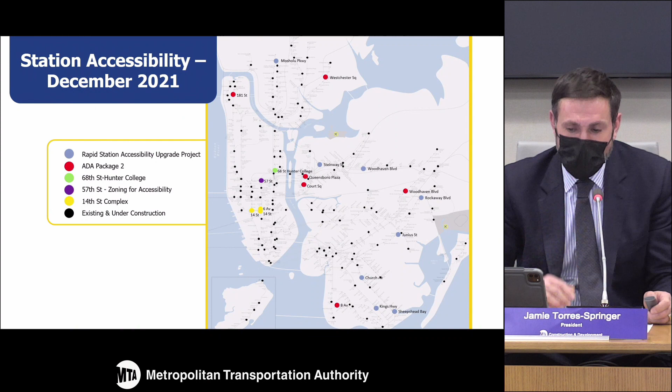You can see the new stations on this map, and I'll go through them in a moment. I want to emphasize that we're using our new modernized approach to capital delivery to deploy every innovative tool at our disposal in creative ways to achieve ADA station improvements.

While we've been using design, build, and bundling of projects extensively, we are seeking the board's approval this month to go to the market for a public-private partnership to deliver 13 stations for us, 8 newly accessible and 5 rehabilitations, through the Rapid Station Accessibility Upgrade Project.

You can see the new stations within that program in the light blue dots on this map. This innovative approach has been used successfully elsewhere across the country and around the world, but is new for the MTA. We also might refer to it as design, build, finance, and maintain.

It means we're engaging with a private partner who will be responsible for building the accessibility improvements quickly and at a lower cost, and who will also be on the hook to maintain the elevators for 15 years. Their payments will be entirely dependent on achieving a high standard of maintenance over that entire period. We expect this strict contractual approach will yield very high outcomes for the quality of elevators in our stations.

We're also seeking the board's approval to award design build contracts for 9 additional stations, including package 2 here in the red dots, a package of 8 stations, 6 of which are new. It's a $251 million investment to be built through design build with a completion date of 2024.

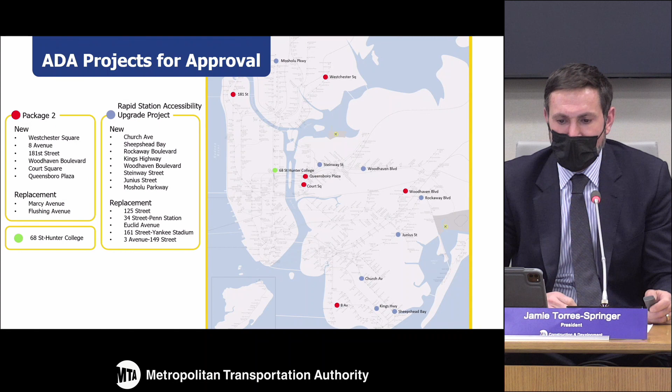And for the 68th Street Hunter College station, that's a $105 million investment. This is very significant as it is the 100th station out of the original 100 stations identified as key for accessibility by the MTA. We forecast completion for that project 36 months from this month, the date of award.

We also awarded a contract last week to make 3 stations on the L line on 14th Street fully accessible. The board approved that last month. We anticipate completion in 2024.

We had our first approval under the Zoning for Accessibility program this month, where a development partner will build elevators at the 57th Street F station. You can see that on your right. That allows access to Central Park and Carnegie Hall, a critical station, and the developer will reimburse the MTA for the cost of maintenance. We're really pleased we were able to create this new zoning incentive with the Department of City Planning.

That makes 26 stations moving forward just this month, 19 of which are newly accessible stations. It's on top of the 13 new accessible stations currently in construction, which will be completed in 2022 and 2023, and 3 station improvements finished just this month. So moving on from accessibility, in total, we're seeking approval of 13 awards today.

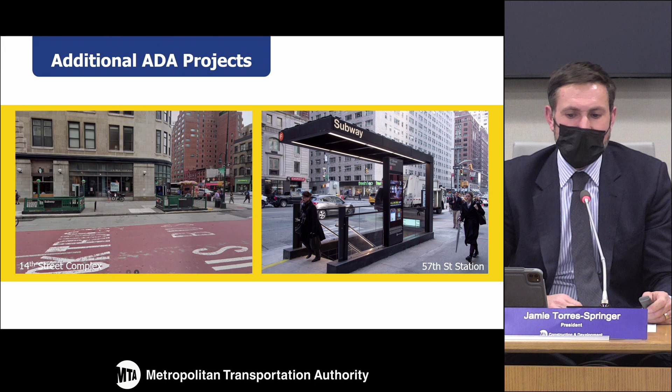In addition to accessibility, I would also highlight our continued work on modernizing the signal system with a new equipment supplier and installer for communication-based train control on the Queens Boulevard East line, and the replacement of the Queens interlocking signal system for LIRR. The last month has also been very active for construction and development on the commitment front.

Our development and procurement teams have been and continue to work very hard to get as many projects packaged and awarded as possible so that we can meet or exceed last year's $6.2 billion commitment number. This quarter, as you see on the left, we have already awarded 18 contracts for $129 million. In this final stretch of these last couple weeks, we expect to award many more projects this month in December.

I would also note that our small business mentoring program, which is an acknowledged leader in promoting MWBE participation in the world of public construction, is something I intend to make a priority of my time at C&D. We continue to make gains in this regard. This year, we've already awarded 44 contracts in this program for over $43 million. And again, the month of December is far from over from a commitment point of view.

We expect to do a lot more in December, so we'll have results to report back next month. We'll get into this more then with a full update, but I want to note that with all this work, we continue to see benefits in terms of value for money from the steps taken to improve capital delivery.

As one measure of success, we're finding that our competitive bids are consistently meeting or under our estimates for those projects. So far this year, 70% of our final selected bids were below our estimated cost, which represents real savings for the capital program.

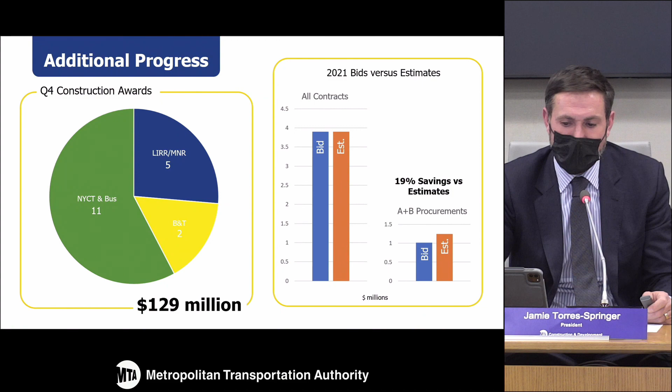It also amounts to a combined 196 months of construction duration saved, which is 9 months per project on average. So that's the update.

In the work plan for CPOC this month, we're giving an update on 3 major integrated mega projects. Just before we get to the Penn Station Concourse project, we have a short video to highlight some of that work.

I want to underscore one point, which is that as part of this innovative public-private partnership for ADA, which has never been attempted before to our knowledge, we are linking payment to the contractors to the success of their ability to maintain availability. So unlike the couple of historical elevators which were built by real estate developers, who had to put in an elevator because the city planning department said this is an improvement you must make.

Once they did it, they got the zoning bonus, and we've sometimes had problems getting them to make the elevators available at all times. They're under the jurisdiction of the buildings department. That's bureaucracy, but it's the truth.

In this case, we will be under the incentive and the requirement that the elevators be available to a very high standard and not broken, which is something we get to enforce, and they will have specific financial incentives linked to. So it's very different than those couple of developer elevators, 53rd and 3rd, and a couple others that have given us headaches in the past, and I don't want that to be misunderstood.

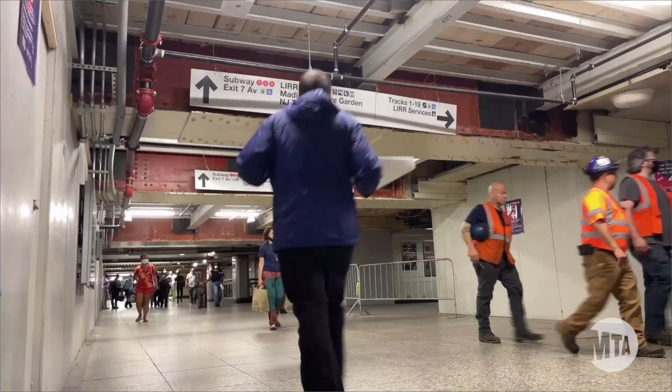Penn Station is the largest transportation hub in the U.S. Three commuter rail services, as well as six New York City Transit subway lines, all converge here in one complex. So whether you're commuting, visiting, headed to work, or just passing through, there's a good chance Penn is going to be the first thing you'll see when entering into New York City.

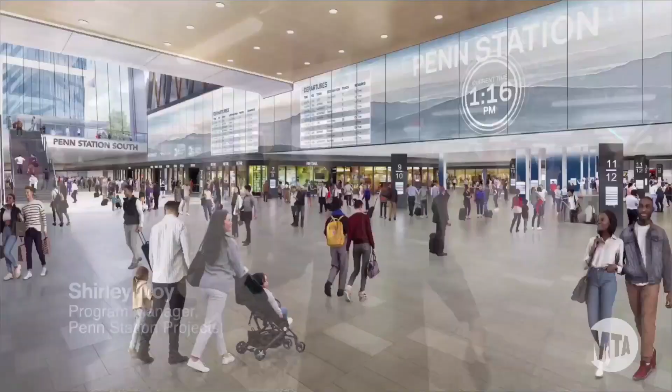Over the years, the different operators, New Jersey Transit, Long Island Railroad and Amtrak, started doing renovations on their own. Each carrier renovated their portion of the station, but there was no common solution for the station as a whole, and it became very confusing. Today, there's a more concerted effort to improve Penn Station.

The end of 2020 marked two major accomplishments as part of that plan: the opening of the massive Moynihan Train Hall and the opening of the East End Gateway.

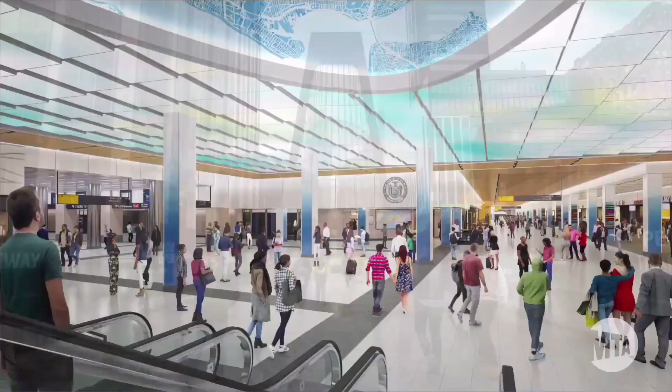Now, the Long Island Railroad Concourse renovation is headed into its final year. The 33rd Street Connecting Concourse and Long Island Railroad Concourse are projects that are going to create additional space for the customers. In order to do that, the key is to take some of the space that was previously used for back of house and retail to provide additional concourse space for customers.

You can get a sense here of how much more space there'll be when the project is completed in early 2023. The columns on the left are where the retail storefronts used to be. They'll now be along the right-hand side when they reopen, which will improve the width of the concourse by 30 feet. You can also get a sense of the new ceiling heights.

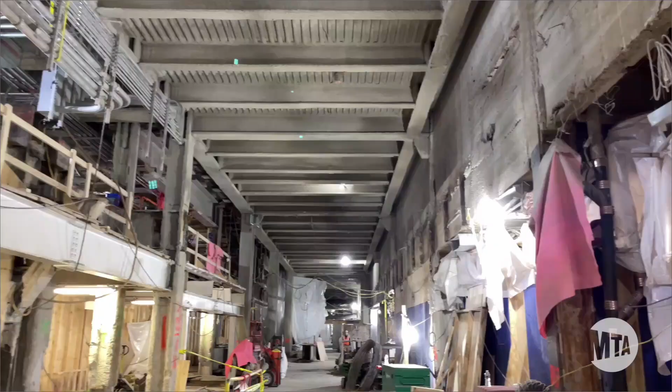Below this ceiling here is where you'll see custom backlit illuminated ceilings to brighten the corridor and make it feel a bit more safe, comfortable, and allow for better circulation throughout the concourse.

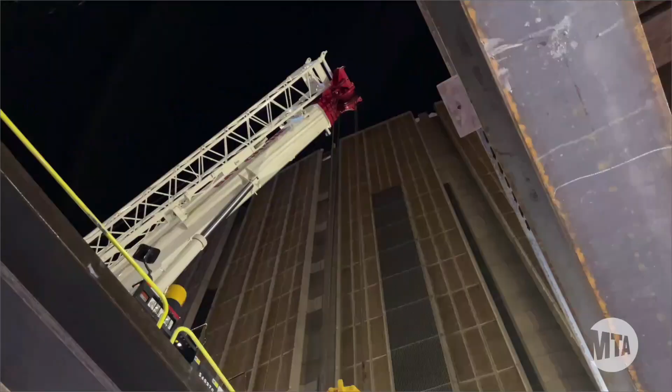The next major phase of this project is actually removing these head knockers from the concourse. That work is happening now. Transferring the load will happen later this month, and early next year we're going to start removing these pieces of steel. In just over a year, all of this work will be completed, and then we can move into the next phase of the Penn Master Plan.

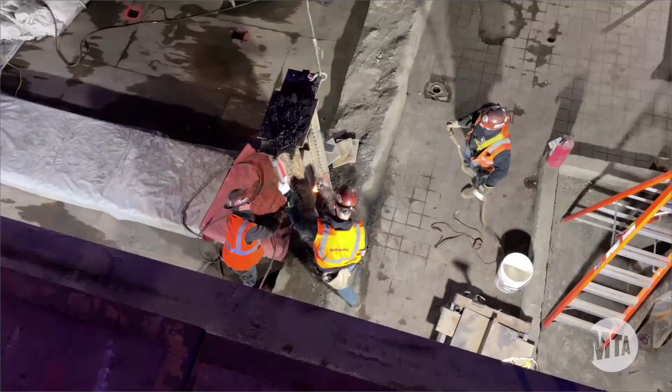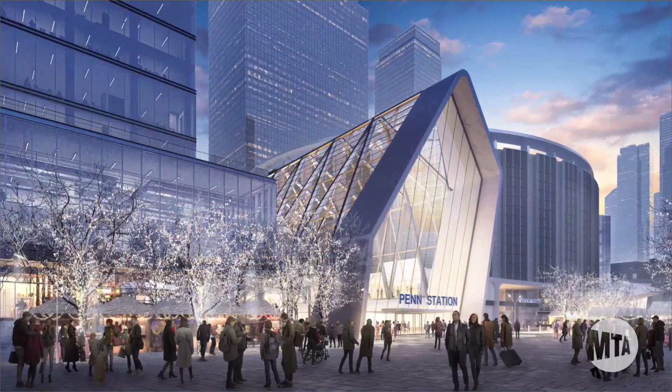Right behind me, where the Madison Square Garden theater is now, will arise a new train hall with an enormous atrium and skylight going about 100 feet up. That will be the centerpiece of rethinking the entire station.

In order for us to start the redevelopment of Penn Station, we need to complete the Long Island Railroad Concourse project, which will give us the west and north side of the station to move passengers and take advantage of the window created when East Side Access opens and before Penn Station Access comes in. Then we can start working on building the Penn Station that New Yorkers really deserve.

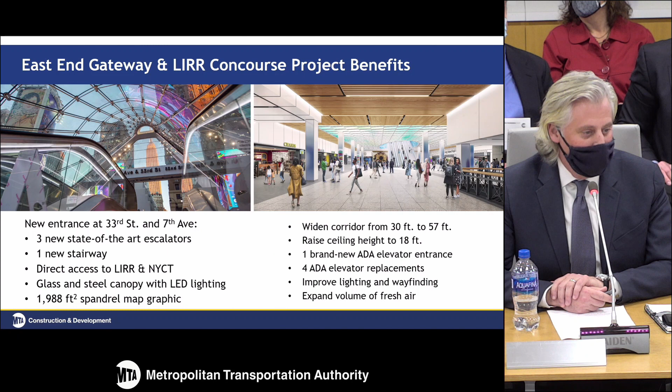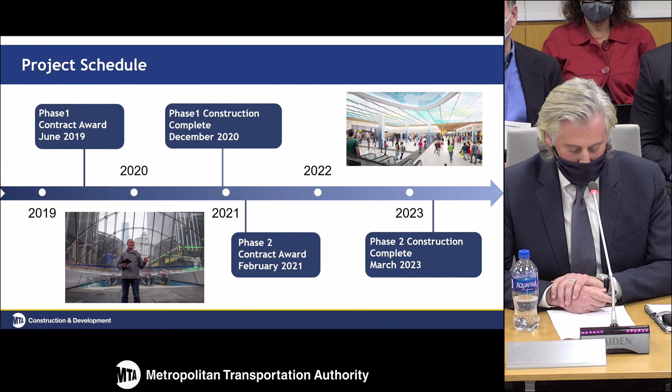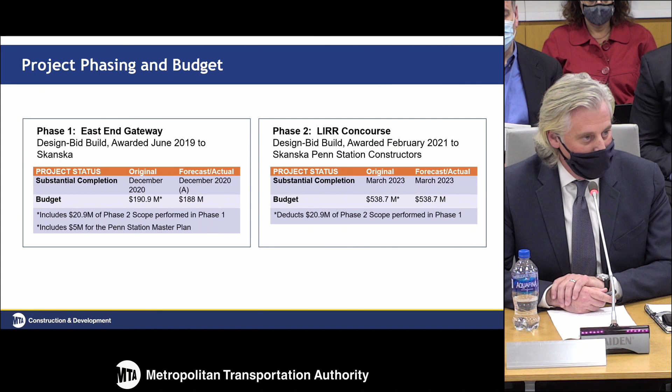Here's our schedule. Our contractual completion is March of 2023, but we are pushing to complete early at the end of 2022. We are on schedule and on budget. We were able to move some early work on the project from phase 2 into phase 1, so that we could jump ahead of some of the work during the pandemic and take advantage of periods of low ridership and when MSG was dark.

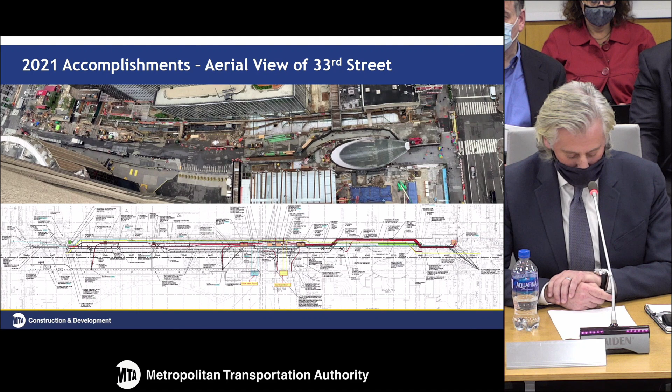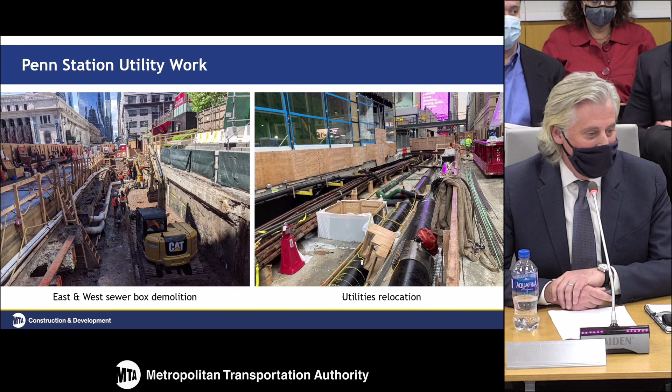These utilities in the map down below all had to be relocated and put at a higher elevation so that we could create that space below. On the left, you see what all that unused space for utilities was. There's a pretty deep utility box that we had to resize and bring up towards the sidewalk, and we were able to do that and then move all these utilities, which you can see is a significant amount of work just from this image. All of these existing utilities -- some of them actually had to be upsized.

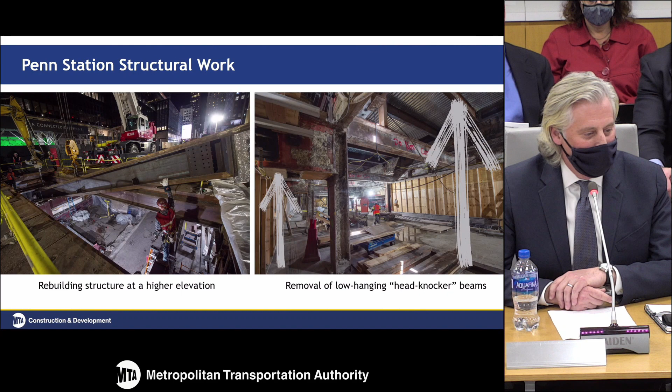And here's our structure going in. I think the picture on the right really shows the difference between the head knockers, which we've termed those low pieces of steel, and the new concourse. You can really get an idea of the difference in this image. And there's just another shot of that.

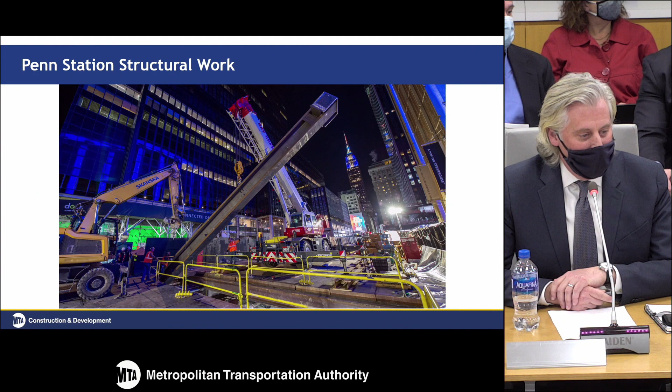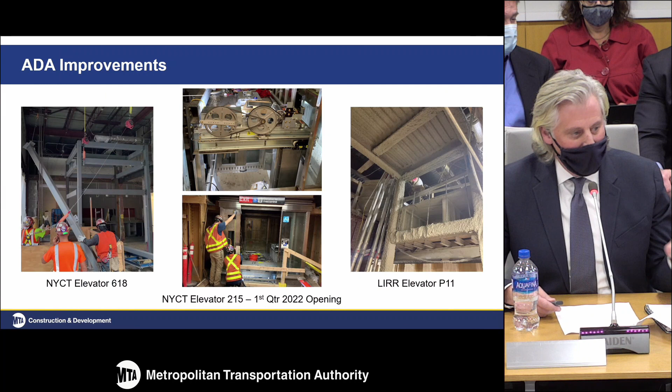To add to Jamie's point on ADA, we've bundled 4 elevator rehabilitations as part of this project, 3 in the New York City Transit 1-2-3 station, as well as a 4th in the Platform 11 elevator. And we're building a brand new ADA entrance from the street down into the station. This is what it would look like at the street level and then at the station level, the concourse level.

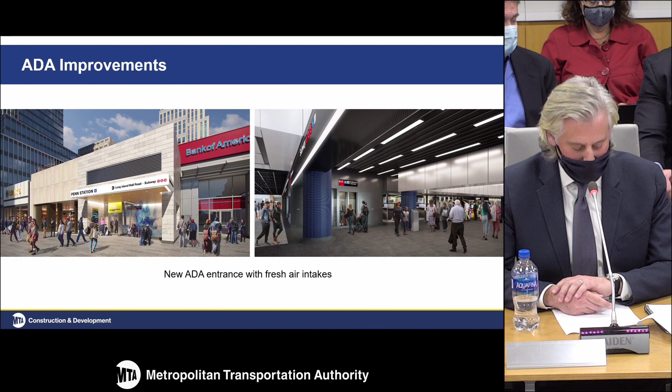Additionally, we bundled in some state of good repair projects. We had an old non-functioning boiler plant that was under the 34th Street entrance, and we've now taken that out of service and put in new boilers. These were completed this month and ready for the heating season.

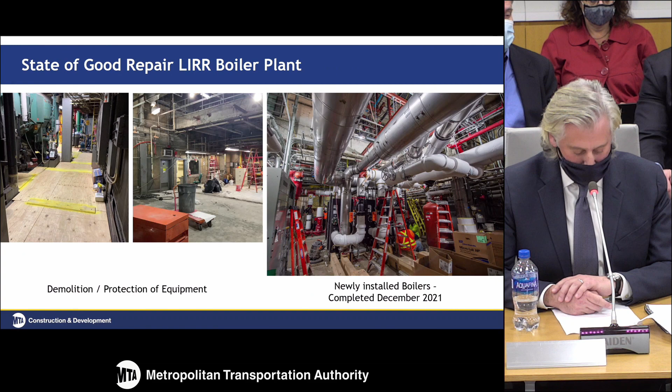Our biggest challenges in this project have really just continued to be working in an active train station, making sure that we keep the station moving and that passengers are protected. A lot of this structural work happened by pulling out the street above and then reforming that street at a higher elevation, so all of that's happening as passengers are moving below. One of the things we're most proud of is that we've had minimal impact on train service.

In addition, there are many significant stakeholders on the project. Amtrak obviously owns the station. We had city agencies involved, utility companies, and then our neighbors, Vornado and Madison Square Garden, always have a stake and a say in the project.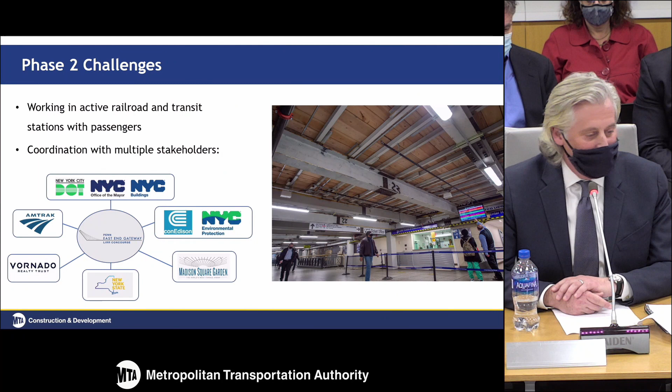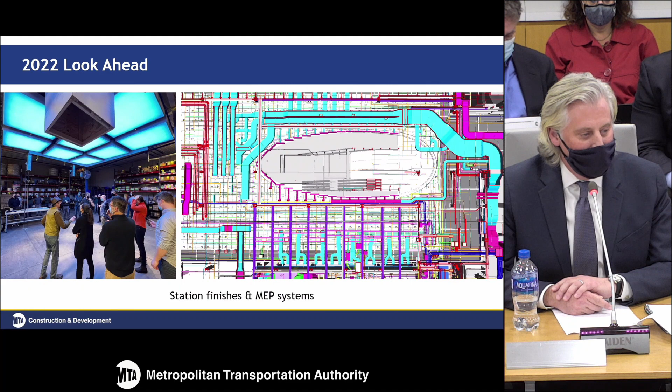Thank you for your time, and I'll take any questions if there are any.

Hey Jano, it's Kevin. I have a question for Jolien. Go ahead, Kevin. Hey Jolien, good to see you again. Thanks for the tour last month.

Very impressive. The news that Jano shared with us today with Chuck Schumer, how does that factor into all the things you just shared with us? Is it relevant, or does it not, and does it help advance the schedule or the project in some ways? Can you tie that in?

Sure, I'll take a crack. The key point, Kevin, is the one that Peter Matusevich made in the video, which is that there is the Penn Access project, which will allow Metro North to come into Penn Station to fill in some of those slots that Long Island Railroad will be leaving behind when a significant chunk of Long Island Railroad customers go across town to East Side Access. That creates a window between the end of '22, when we open East Side Access, till about 4 years later, when Metro North comes into Penn, that we want to use to get the heavy construction in existing Penn done, when we have the fewest possible riders dependent on Penn. So that's why we call it the window of opportunity to get the heavy structural work done that will be necessary to change existing Penn from what it is today to what the governor has laid out it can and should be in the future.

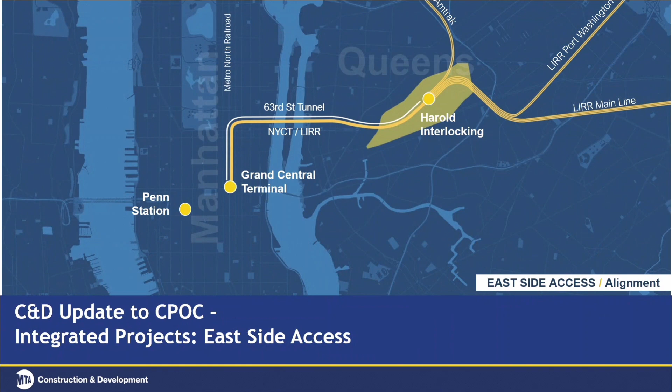As you may recall, we bifurcated the delivery of the track systems and the concourse. The reason we did this was because the longest non-construction pre-revenue activity is the physical characteristics training of the Long Island Railroad train and engine crews. Physical characteristics are an FRA requirement for the engineers to have stick time to familiarize themselves with the territory and train handling. Finishing the concourse, however, has been a challenge due to slow progress by our CMO 14B contractor and rework required for the escalators.

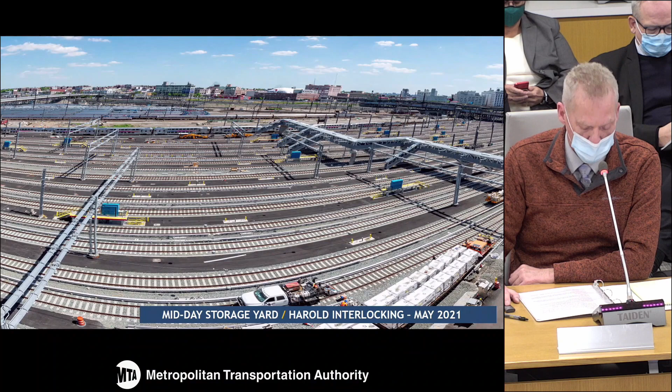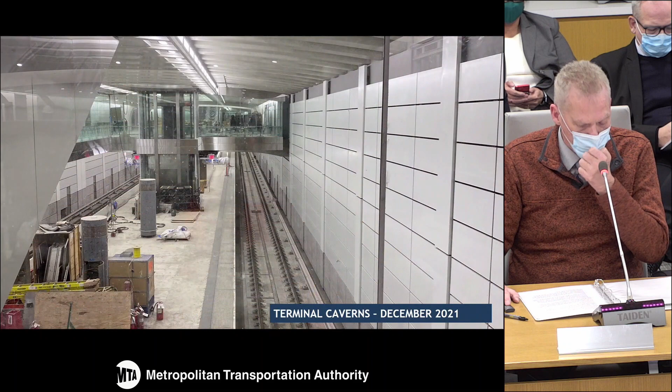We have come a long way, though. Here's the Q-tip excavation where we launched the tunnel boring machines that daylighted into Harold interlocking. And here's the same area now with a fully functional midday storage yard, which is where the trains and crews will be staged. This slide is 150 feet below Grand Central Terminal, and this is the same area now with the platforms, mezzanine, and track constructed.

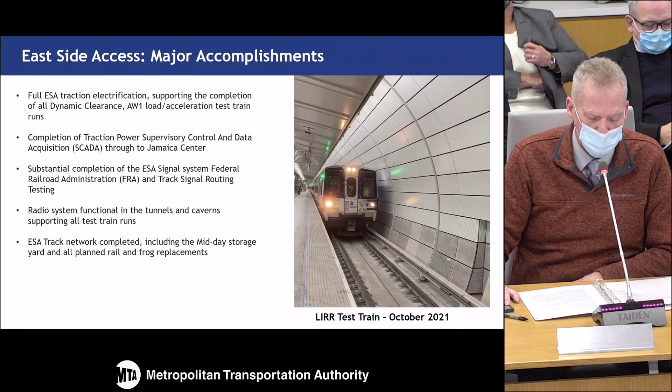The specific steps we are taking include realigning the contractor's testing activities to ensure functional pre-testing is being done as efficiently as possible. And we've established commingled test teams with multiple contractors, mainly TPC and GCTC. This will flush out issues early and allow the integrated testing to be performed at a faster pace.

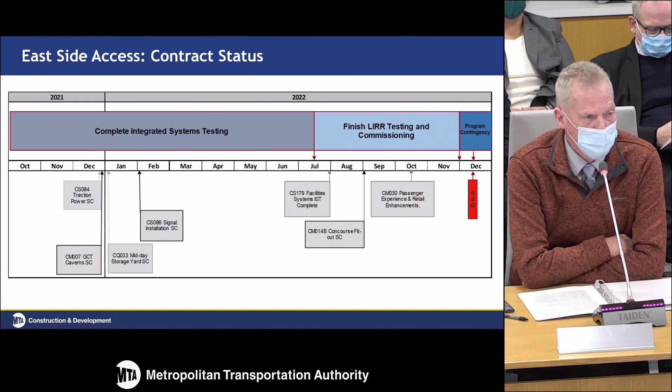We have directed the contractors to establish a second test crew working 10-hour days, 6 days a week. This is the most critical element of making schedule and recovering float. A third testing crew and a construction management crew to act as a scout team will identify issues early with assets. I do want to note that the Long Island Railroad Fire Marshals assigned to the program have been very helpful in witness testing and identifying issues early prior to the final integrated testing.

As we review the overall program, I want to note that this is akin to a three-dimensional chess game where each contract and contractor is dependent upon elements of the other. This is not simply a linear construction environment. The platform and mezzanine, in regards to the station and concourse, require only architectural finishes to be completed.

And I do want to note that the terrazzo epoxy has been limited due to COVID, with the contractor only being able to receive certain allotments. GCT is pre-testing systems in the concourse, but deficiency of assets, a functioning chiller, Biltmore, and coordinating testing is creating issues. Right now, this remains my biggest concern for completion of the program.

GCTC has made changes to the contractor's executive staff, and this has shown early promise. The chiller control system has been revised, and we expect to complete those revisions Wednesday. Additionally, as I said before, the contractor has been directed and has agreed to testing 2 shifts, 6 days a week.

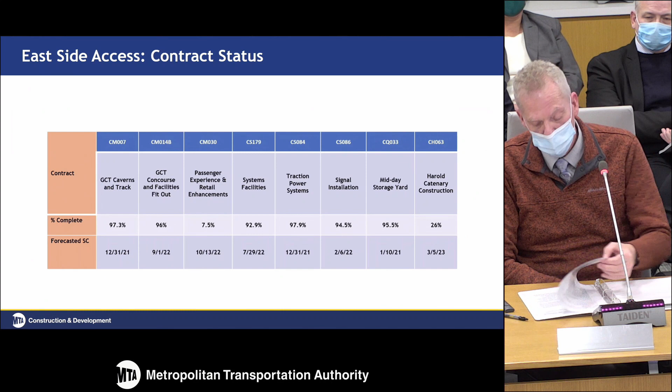The Biltmore escalator connections require removal of Metro North electrical equipment upstairs. Schneider Electric has provided deficient material and is late in correcting the delivery of that material. We expect that to be completed this week. The CM030 contract is a station enhancement contract which was recently awarded to create a dynamic 21st century environment in the concourse.

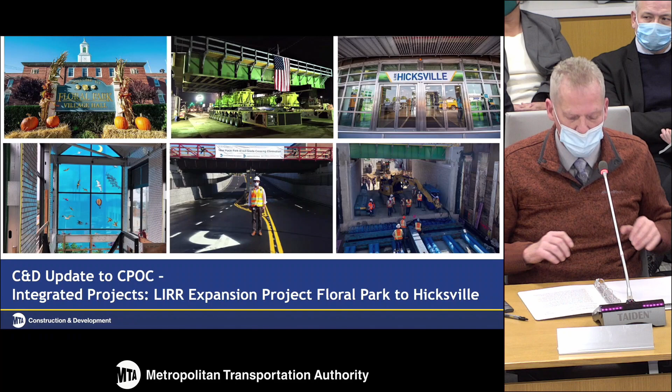Moving to the track systems, there have been issues with corrosion on fan bearings, but we have an agreed fix which will be completed by end of January.

The track integrated test is moving quickly as expected at the end of the year, which will allow physical characteristics to continue. Tutor Perini is the last contractor standing and is critical to achieving the end date. I do have commitment from their executive leadership that they will support MTA in achieving that goal.

The traction power system within the tunnel is complete from a construction and testing standpoint, and we're in the process of getting all the final documentation ready. I do want to publicly acknowledge to the board how cooperative and productive Con Edison has been, particularly during this holiday season. We've been able to, within the past 4 months, get all but one of our power substations energized with at least 2 feeders.

Signal system will be tested complete by the end of the year. However, positive train control, which was not part of the original contract, will be completed and ready for testing by the end of the year.

Our midday storage yard, which you saw a photograph of earlier, is nearing completion. IDA created some issues with a DEP sewer siphon being clogged and the yard not draining properly. We are currently in talks with DEP over responsibility for cleaning that siphon.

CH063 is a regional improvement and it's not required for regional revenue service. This includes catenary contracted construction. We have concerns that remain around Amtrak's ability to support with flaggers and qualified foremen, as well as design submittals. Amtrak is working closely with the program team to mitigate and respond with appropriate personnel.

Overall, the East Side Access Project remains on budget and on schedule. Our analysis verifies that the budget of $11.1 billion with allocated and unallocated contingencies remains sufficient to complete the work required to enter revenue service as now planned. Also, the IEC concurs with the project that the revenue service in December 2022 is still achievable.

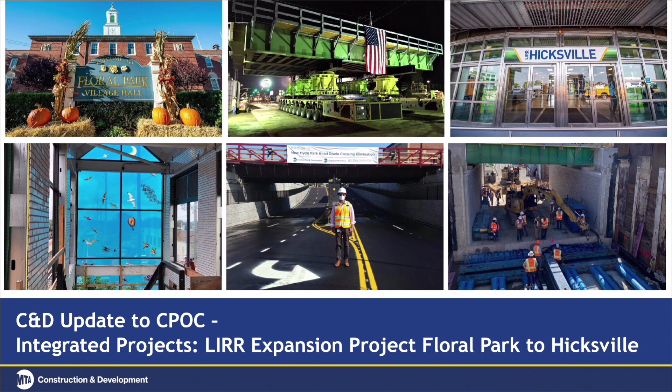Systems testing, which has previously been reported as a concern by the IEC, remains critical to the success of the program. Contractor performance, quality issues, and change order work have impacted the testing schedule, resulting in the consumption of schedule contingency. This has caused the completion of remaining concourse and facility system testing to move to August of 22 from the contractual date of June 22.

Operational readiness activities have advanced significantly and are expected to continue to the end of the project. The completion of the track, traction power, and signal systems in December of 21, along with the award of an interim contract or contracts for the maintenance of these assets, enables the Long Island Railroad to commence physical characteristics training on the East Side Access right-of-way.

While the project team is working closely with the contractors to address outstanding issues and increase productivity for the remaining testing work, the IEC finds the major schedule risk being that if any further delay to this work is not mitigated, it may compress the critical 3-month period necessary for MTA and the Long Island Railroad to take over the systems required to begin revenue service.

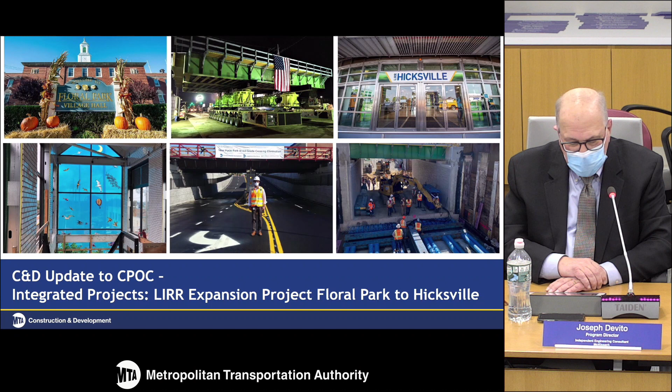Close coordination is ongoing between the project team, the Long Island Railroad, and the FRA to ensure a safe, smooth transition from construction completion to operational readiness to the start of service. And that concludes my report on East Side Access.

Joe, do you have another report on the prior project, or are we moving on? We're not reporting on the Penn Station concourse yet. Just checking if there are any questions or comments from board members related to East Side Access.

Thank you. Then we'll move on to Anthony Trufano, our project executive for the LIRR expansion project, or third track.

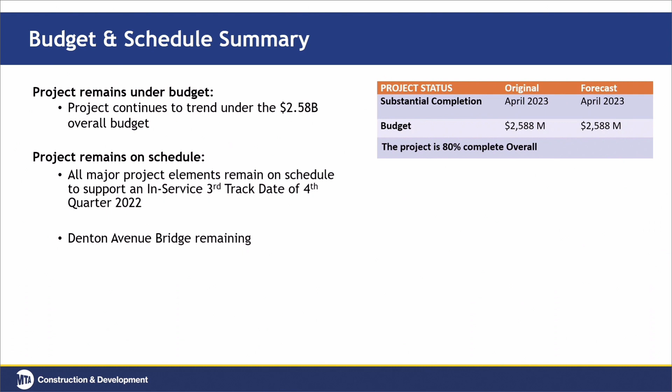The project remains trending under budget, although we're 80% complete at this time. The schedule remains intact to deliver fourth quarter revenue service on the third track, and we're holding our April 23 project completion date. All project elements remain on schedule, with the exception of Denton Avenue Bridge, which is in pending litigation with Garden City. We have an alternative plan to protect the schedule, a temporary bridge, in the event we need to trigger that if the litigation doesn't go our way.

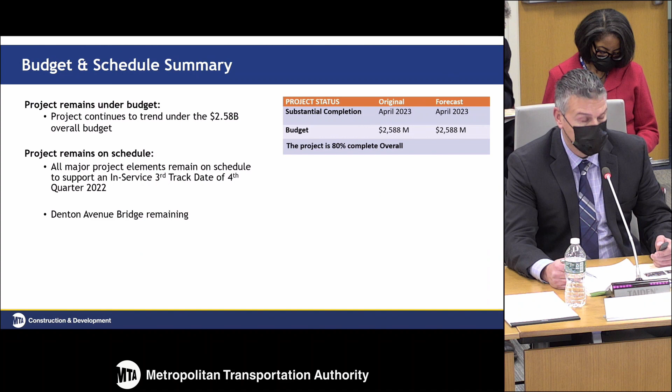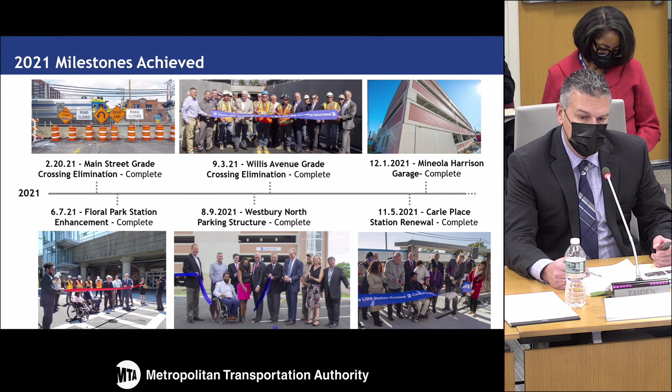So for 2021 milestones achieved: we closed Main Street grade crossing, opened our ADA elevators at Floral Park Station, eliminated 2 grade crossings at Willis Avenue and opened them to the public, opened the Westbury North parking garage and the Mineola Harrison parking garage, and cut the ribbon on Carle Place.

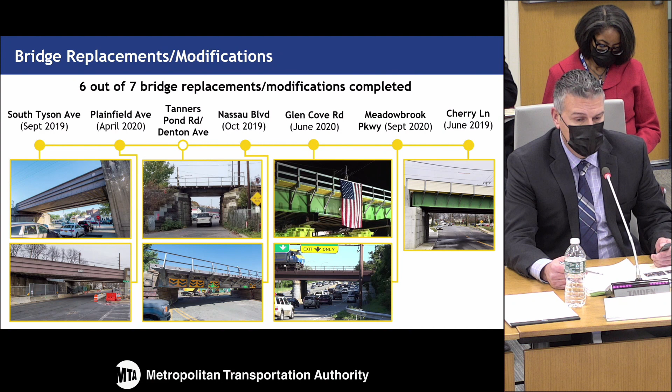To date on the project, all 7 of our grade crossings have been eliminated, and 6 of 7 bridges have been remodeled and replaced, except Denton Avenue. At this point, now that civil work is really completed, we're transitioning into a track and systems project. I'm happy to report 37% of our third track is laid, which lines up right in line with our in-service date at the end of 2022.

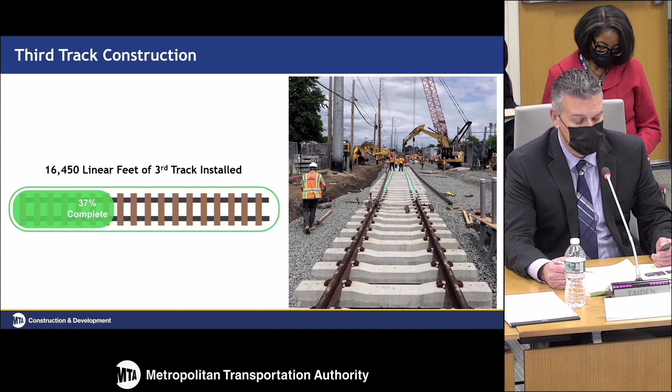In addition, we had other achievements: Nassau 1 interlocking was cut over, 79% of our right-of-way utilities have been installed, 1 substation is online, 4 are currently being commissioned, and 2 are in fabrication getting ready for delivery, and over 88% of our retaining and sound wall have been achieved.

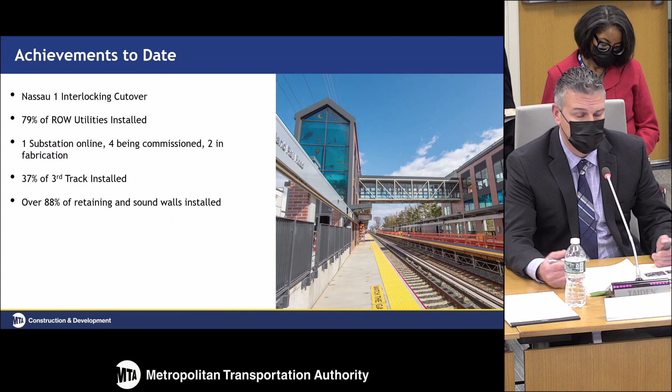I really have to say, through the COVID pandemic, our partnership with the Long Island Railroad, their workforce, and the integration with the Long Island Railroad workforce and the third-party contractors' workforce has been terrific. That's why we're able to achieve this aggressive schedule.

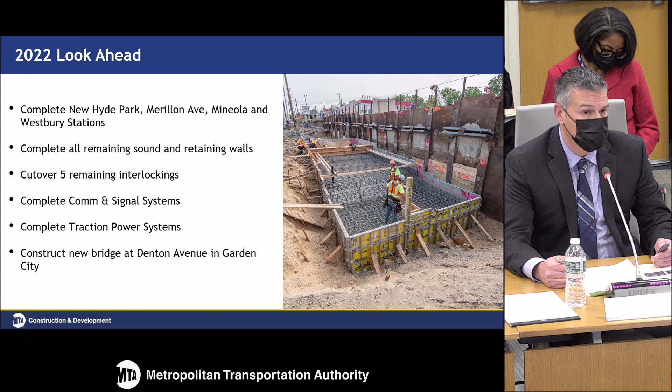Looking forward to 2022, we're going to complete all of our remaining stations, complete all of our remaining sound attenuation wall and retaining walls, cut over our 5 remaining interlockings, our comm and signal systems, our traction power systems, and replace that bridge at Denton Avenue. Then at the end of the year, we'll be running that new third track to align with the other mega projects that are connected to it.

Our risks on the project: next year is very aggressive, with tremendous operational impacts to these cutovers, a lot of systems cutovers. We are very confident we're going to meet those dates through our interaction and coordination with the Long Island Railroad. We're lined up with the contractor and their subcontractors to deliver this project as we did all the other elements for the last 3 years. The biggest risk right now is Denton Avenue.

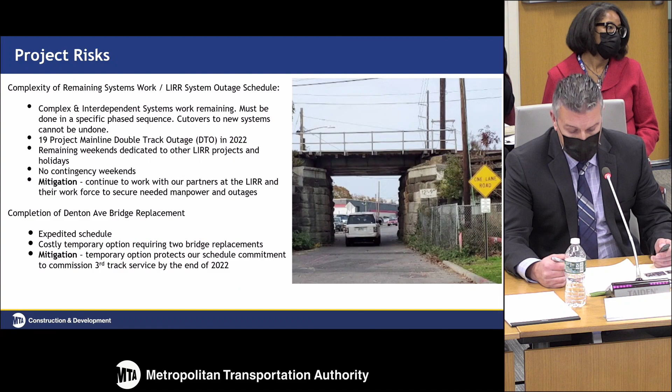Although we have a temporary bridge option that we will trigger in the event our hearing this Wednesday does not go in our favor. We're ready to trigger that option, which will drive up costs, but it'll protect the overall project schedule and deliver service at the end of this year. That concludes my report. I'll take any questions at this time.

On the last slide you showed, this temporary $50 million replacement bridge, so everything stays in place as we see it, like it seems to be a single lane tunnel going through, or? It'll be a single bay bridge in front of that old bridge.

So then when you eventually decide the settlement, everything gets removed? Everything will be replaced at a later date because that bridge is beyond its useful life. But Randy, the key point is there's a $50 million premium if we have to, because of this litigation, do this in 2 stages and come back and do it again. That's not the right outcome for the public.

I know, I saw that, yeah. And we're counting on the court system, which has said again and again that we are within our rights and that it's improper for the permit to be withheld. We're counting on that to enable us to move the project forward. It would be great, there's a hearing next week. Yeah, we didn't have to spend that. I understand that. Thank you.